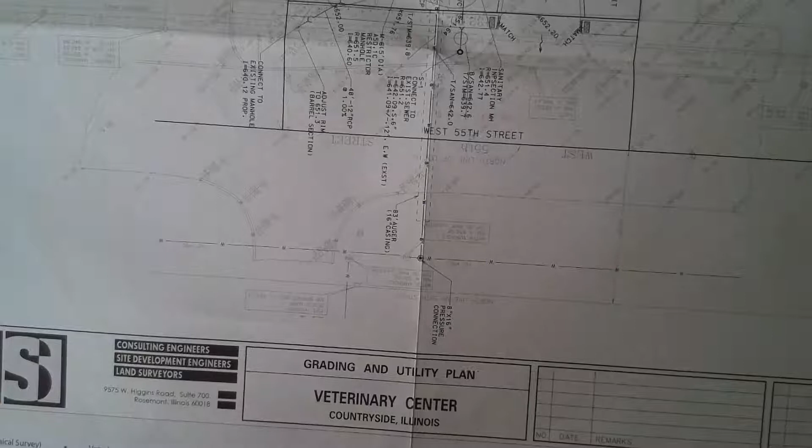Here's a little presentation for assignment number 14. It's dealing with the grading and utility plan. On the other side of this sheet is the topographical survey. If you look quickly here, you will notice some utility lines are already called out. Here's a water utility line. Down here is a sanitary line, sanitary sewer, a storm drainage line or a drain line, and overhead electrical wires.

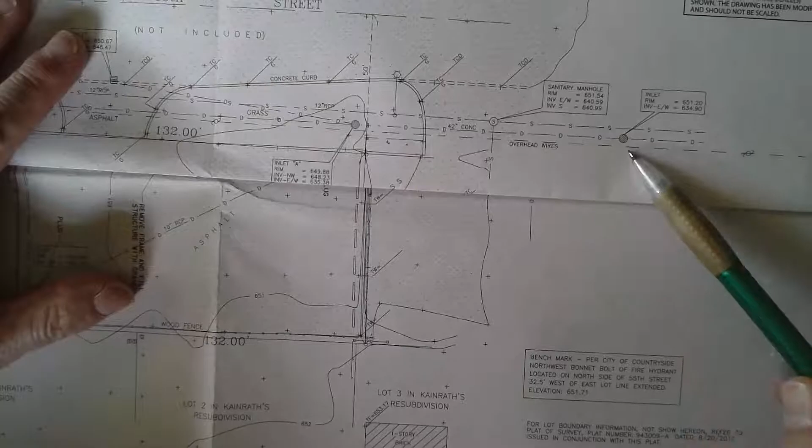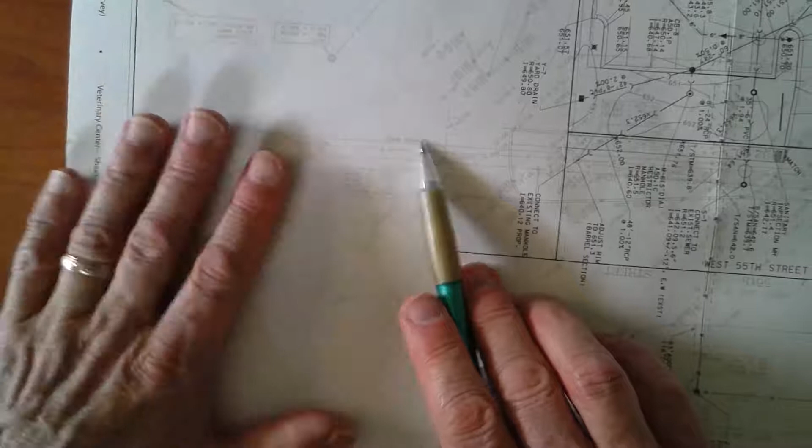Those same lines are represented here on the site grading and utility plan. Here's the water line. Here is a sanitary sewer line, the storm sewer drainage line, and the overhead wire, electrical lines. If I take a look at the water line here, I can follow that water line that's out in the street, follow it back.

As I follow it back, I will see where it comes in, and it turns to go towards the building, and it turns again, goes into the building. And it goes into the building right here on two different sizes. You've got a 6-inch diameter size and a 2-inch diameter size. The 2-inch diameter size is your typical water supply into the building for plumbing fixtures, toilets, sinks, drinking fountains, so forth. The 6-inch diameter size is for fire suppression for sprinkler systems in the building.

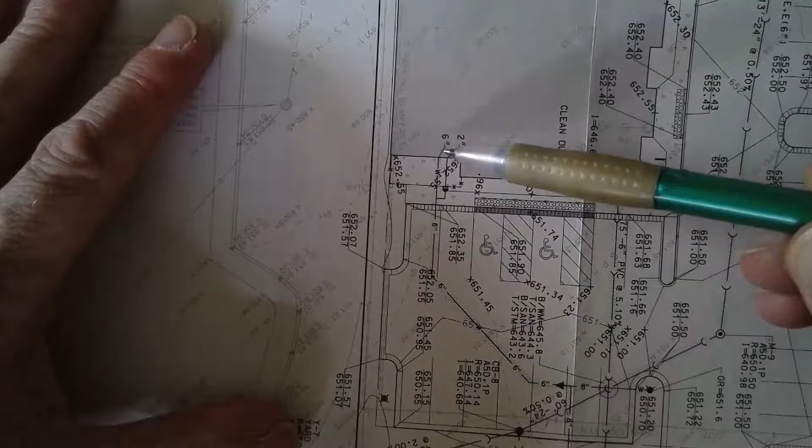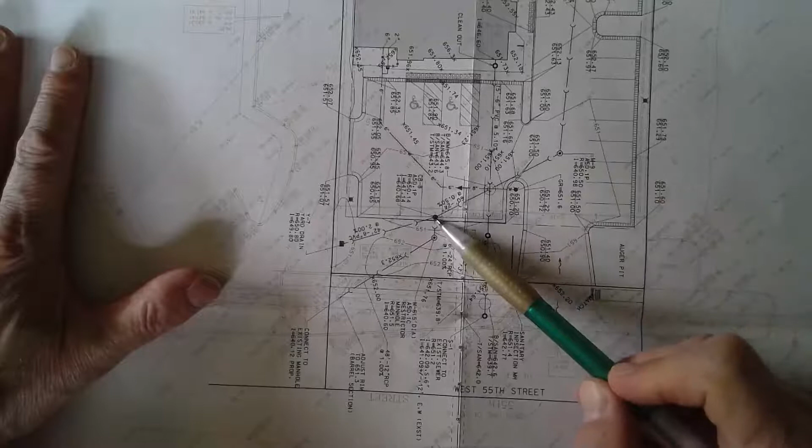Notice there is a north arrow on the drawing to indicate north, east, west, and south. If I come back to the northeast corner of the property, I'm going to take a look at a callout of a yard drain that's right here. This yard drain is where storm water, rainwater, melting snow get into that drain. And if you follow it, it'll follow along a storm drain line. Here's a catch basin that leads in another catch basin or a manhole.

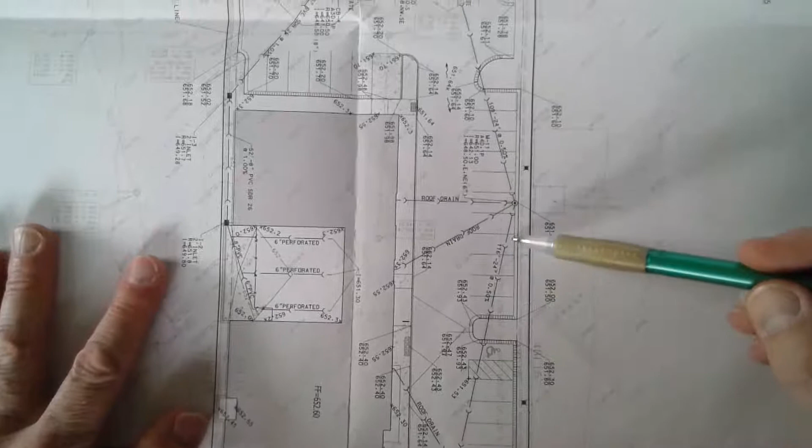I follow that line down along the west side of the building. It ties in from roof drain coming from the building. If I keep going, I can see that line following down. It comes from another roof drain here, another roof drain over here. And I follow that storm drain line, and it goes into a retention pond or retention basin. And there's also another drain line that comes in that retention basin if I follow it backwards along here.

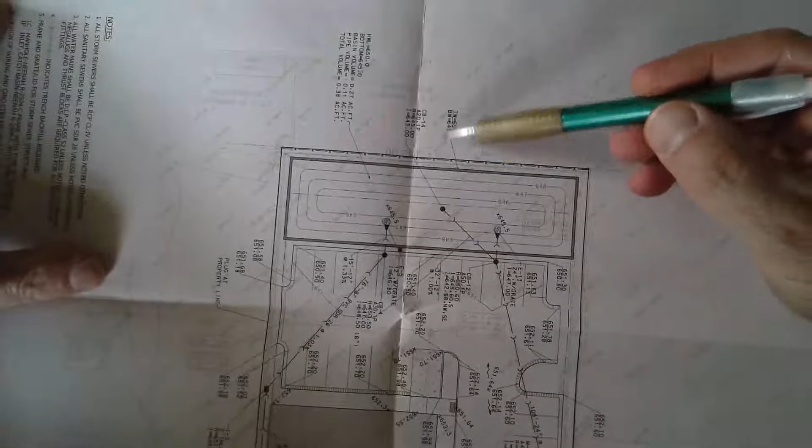Well, notice that there's a little number right here that relates to this wall around this retention basin, this protective wall. I'll notice that I've got the letters TW, which means top of wall, that has an elevation of 650.9 feet, and BW, bottom of wall, which has an elevation of 649.0 feet. So from the top of the wall down to the bottom of the wall, you got a difference of, looks like 1.9 feet.

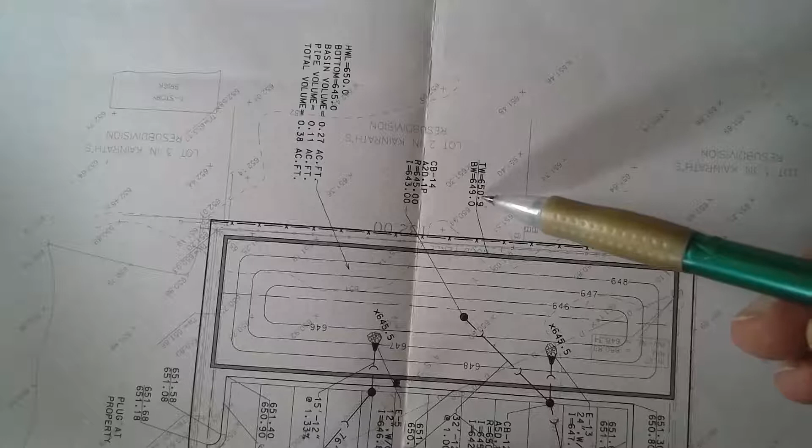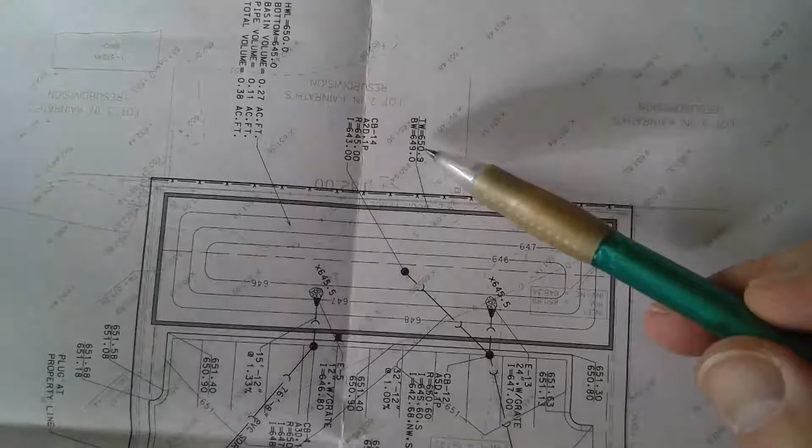Understand that every number that you see on this drawing, a number here, a number here, a number here, numbers out here, these are all numbers for elevation height above sea level. And those numbers are in a standard unit of decimal feet, both for this grading and utility plan as well as the topographical survey. Let's take attention to notes over here on the drawing.

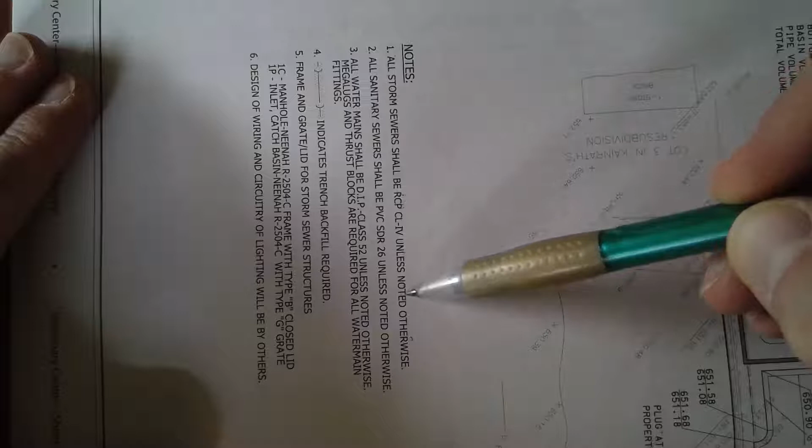Here's a note that says all storm sewers shall be RCP CL-IV unless noted otherwise. I'll repeat that again in easier terms. All storm sewers shall be reinforced concrete pipe class 4 unless noted otherwise. All storm sewers, drain lines, storm drain. That's what we saw over here going into the retention pond.

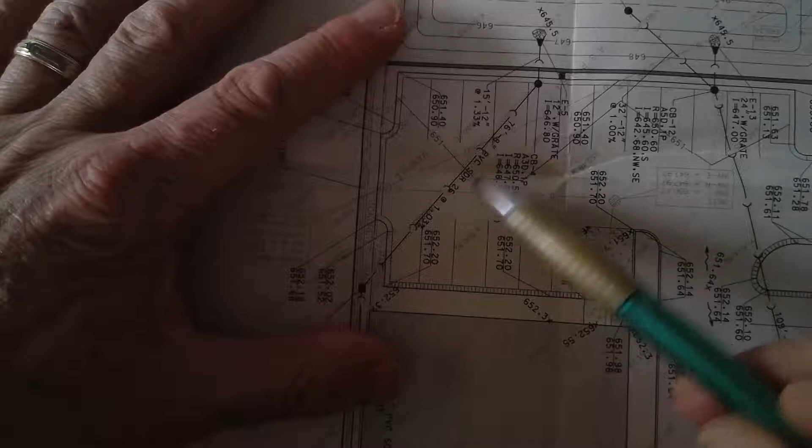But let's take a note right here. I've got a little line right here coming into the retention pond, and it says it's an 8-inch diameter PVC, polyvinyl chloride. That's plastic pipe. Over here, I just see a distance of 109 feet of 24-inch pipe. Well, that's going to be your reinforced concrete pipe. So I got two different drain lines going into this retention pond. They're different materials.

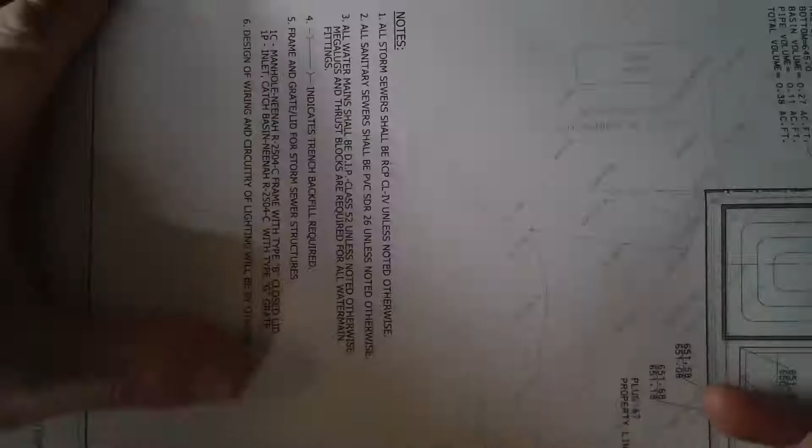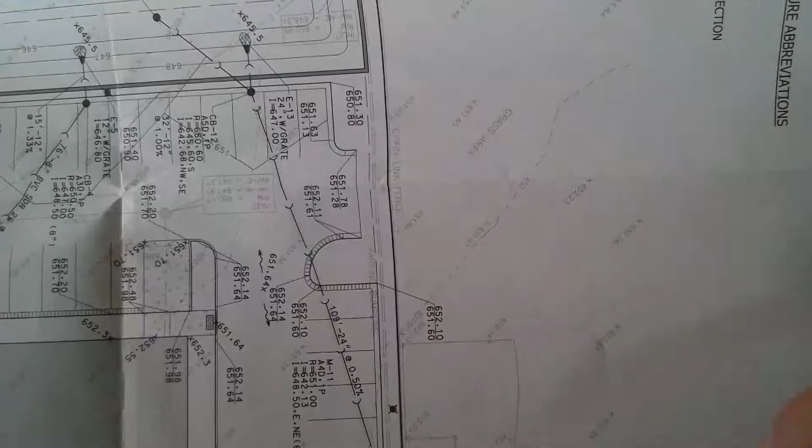That's why note number 1 says all storm sewers shall be reinforced concrete pipe unless noted otherwise. Well, we are noted otherwise. Right here it's noted as polyvinyl chloride plastic pipe instead of reinforced concrete pipe elsewhere. That's why you have notes to help interpret what you see on the drawing. Let's take a look at another situation.

If I take a look around the perimeter of the property, you're going to see lines indicate a curb that goes around the property. And if I look at the curb at a point, let's say right here, if I zoom a little closer to that, I can see I've got two numbers for this curb. I got a number of 651.79 and 651.29. The taller of the numbers is the top of the curb. The bottom of the two numbers is the bottom of the curb.

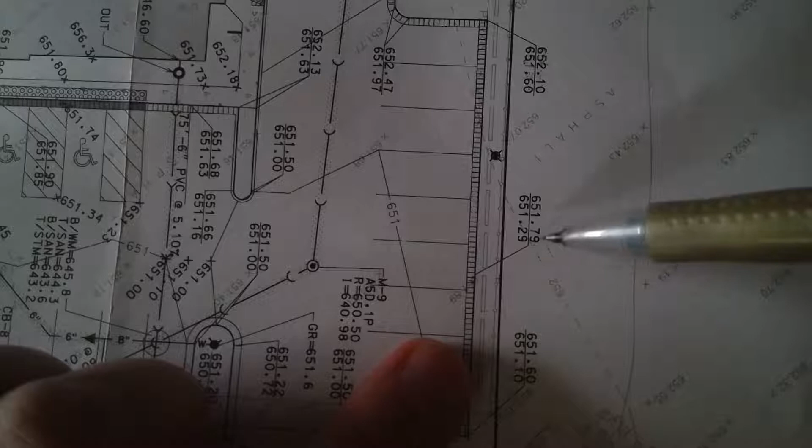So from 651.79 down to 651.29, that's a difference of 0.50 decimal feet. And 0.50 decimal feet is half of a foot, which is equal to 6 inches. That's the same thing with this number right here. 651.6 and 651.1. A difference of 0.5 decimal feet, which is equivalent to 6 inches.

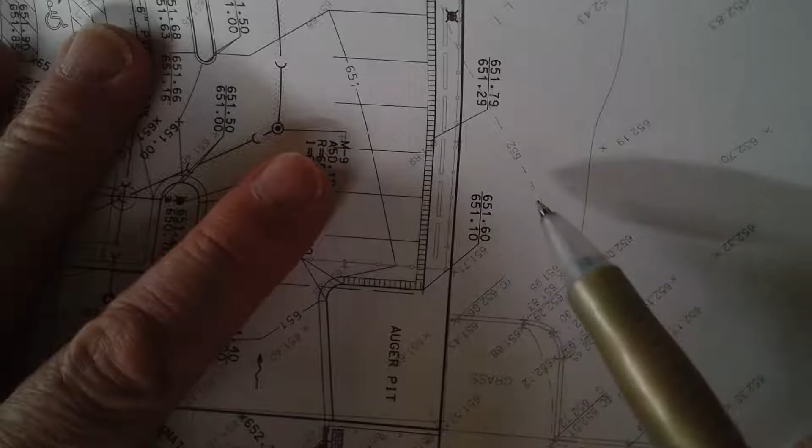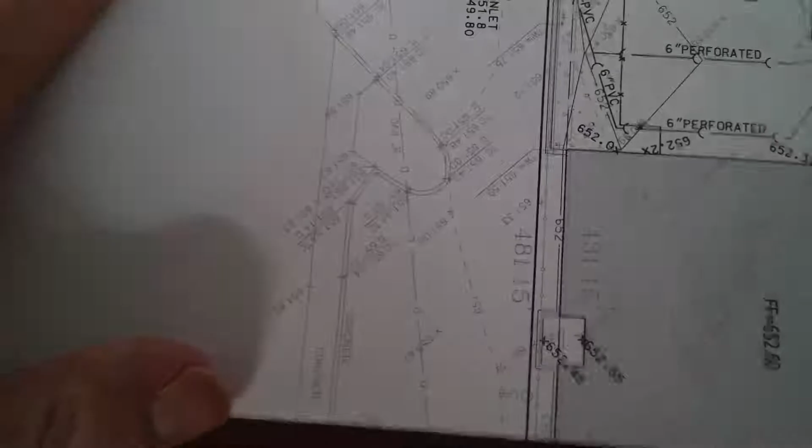I'll also notice that there's a question in your book that pertains to a door that enters into the building. And I believe that door is on the east side of the building. And it's looking at a doorway right here. Let's go up here. There we go. This doorway right here in the building. You've got 2 points of elevation on this doorway.

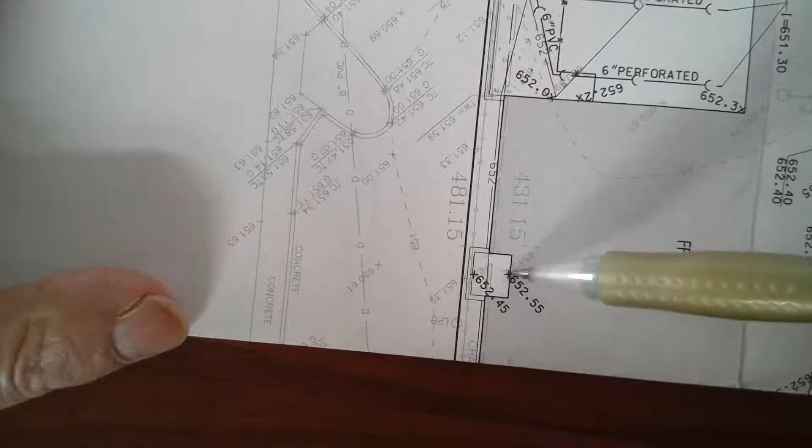There's a little concrete pad that you walk onto, and then you go through a door to get into the building. This point here at 652.55, and this point on the concrete pad is 652.45. So you got a difference of height from the pad up into the door of 0.10 feet.

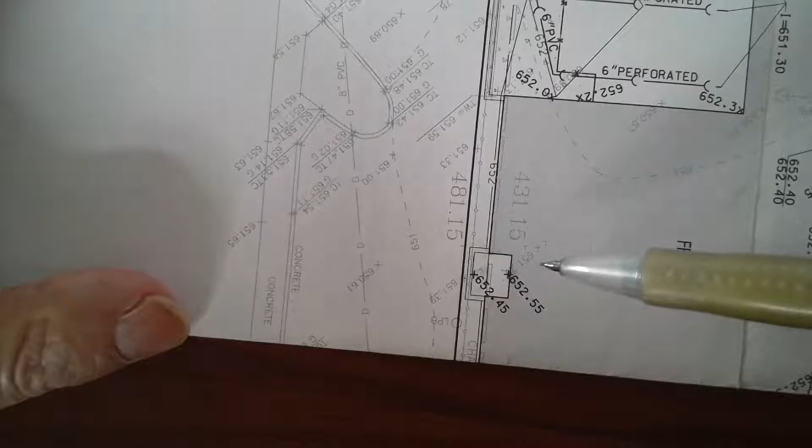Well, it says on the question in the assignment for the textbook, there's a door right here, door number 139B, as in butter. Well, I don't see anything there about a door or what door number it is. You will not see that on this grading and utility plan. What you will need to do is to go look at the first floor plan of this veterinary center.

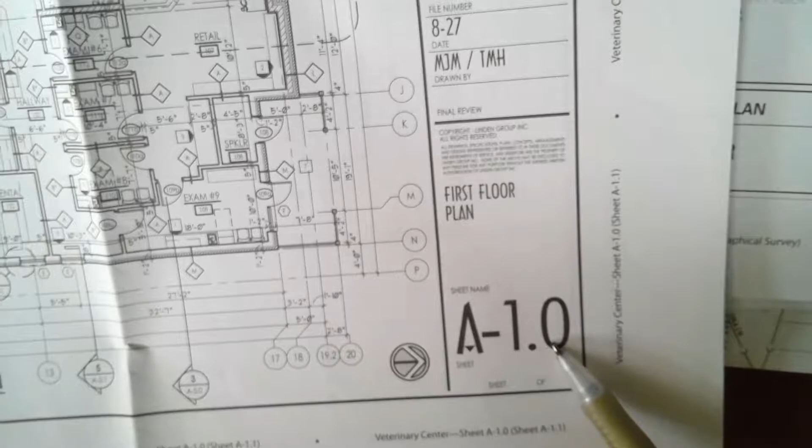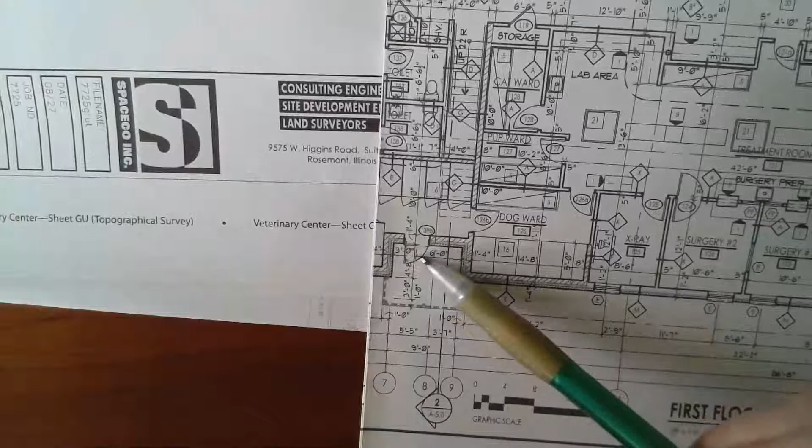So if I look at the first floor plan of the veterinary center right here, this is sheet number A1.0. If I look at this first floor plan, I will see there's a doorway right here. And here's your concrete pad, just like we saw on the utility plan. Right here, you can see you got number 139B, which stands for this door symbol. So this door right here is door number 139B.

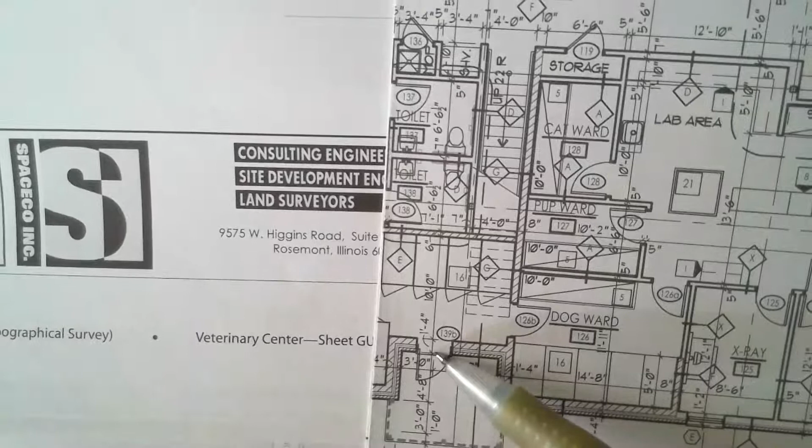So if I get a little bit closer, there we go. Might be able to see it a little bit better. Here's 139B, that's this door, and here's the outline of this concrete pad. So they got a point of elevation for the door right here on the utility plan, and a point on the concrete pad on the utility plan.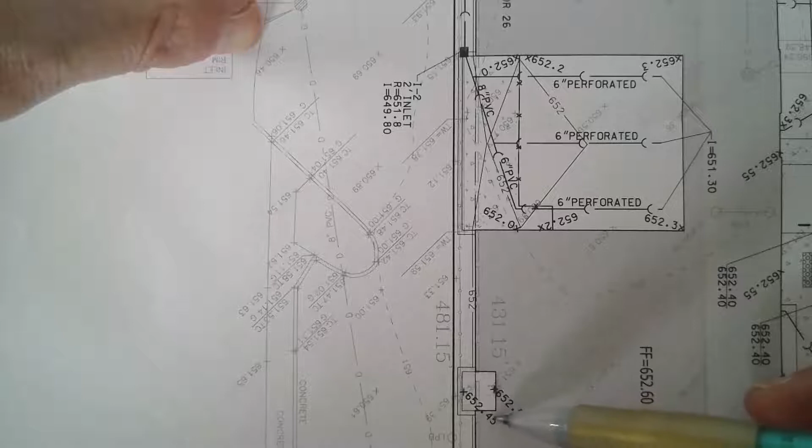So going back, here we go. Whoops. Here's our points right here. Here's the point 652.55 where the door goes, and here's the point on the concrete pad at 652.45. So height elevation of 0.10 feet or 1/10 of a foot. All right, hopefully that might help you with assignment number 14 for the grading and utility plan.

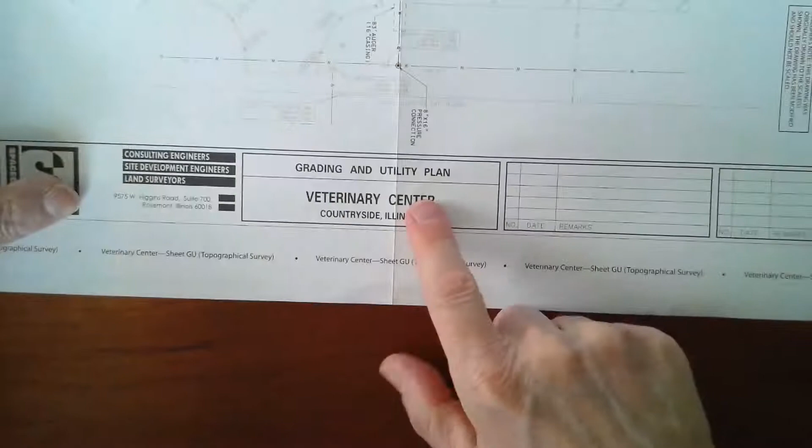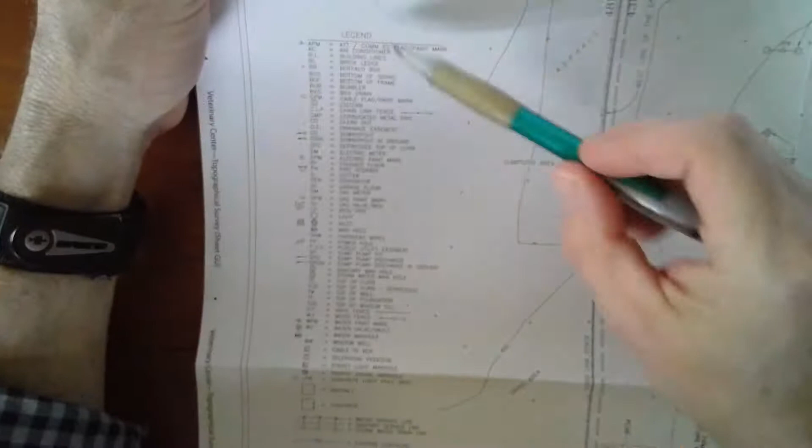But I'll mention another item to look at that might help you as you look at this utility plan. If you look on the other side of the sheet for the topographical survey, and you open it up, you will see there's a symbol legend down here to indicate abbreviations and some actual drawing symbols that show up on the sheet. Let's take an example here.

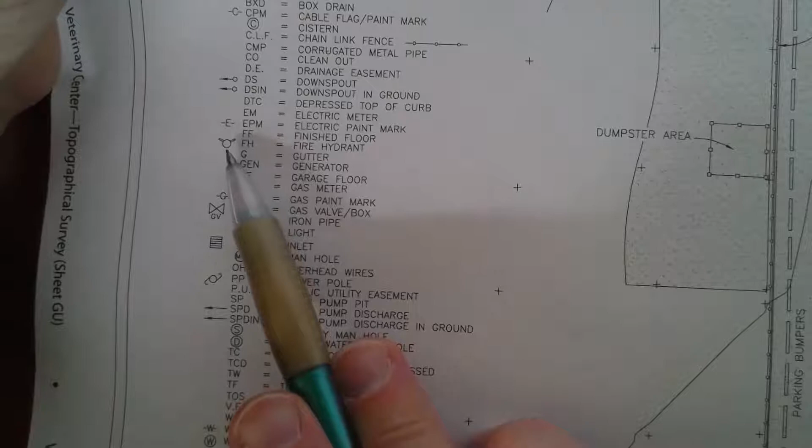If I take a look at a fire hydrant, the fire hydrant has a symbol. It looks like a little circle with little horns that stick out on it. We'll see that symbol in the utility plan. Let's look at it real quick. Right here is a symbol of the fire hydrant, and that connects over to the water line that we saw coming in out from the street, because the water line from the street comes in, it feeds into this fire hydrant,

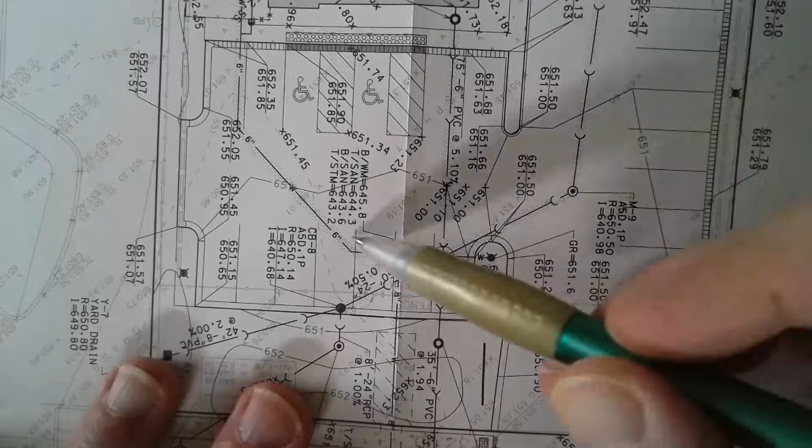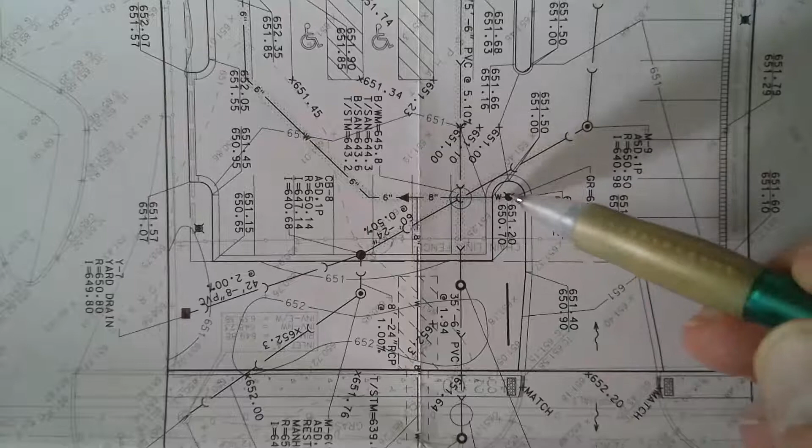and there's the W for water line, but then the water line also follows over down into the building where it comes in at a 6-inch diameter size, and it branches off, goes through a water meter, and comes in as a 2-inch size, as I had mentioned earlier. So this little symbol here for the fire hydrant, there's the circle with the 2 little horns sticking out on it, and W for the water line that attaches to it. Okay, hopefully this helps you with assignment number 14.